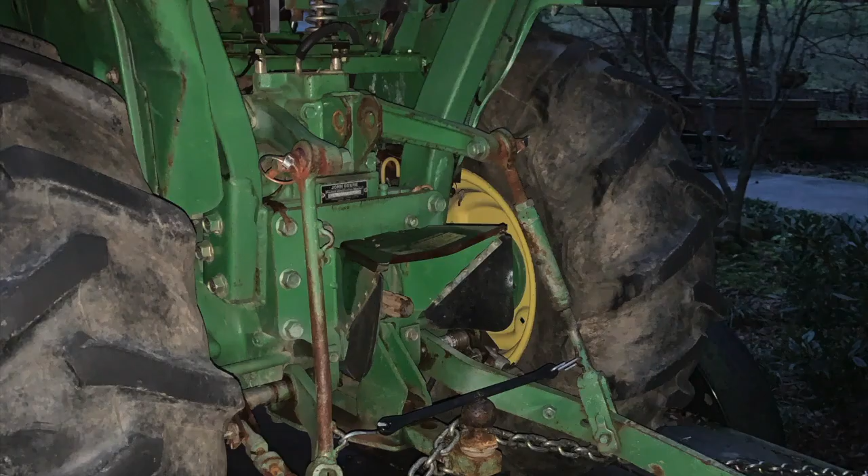So for our project, we're tasked with creating a log lift for a single user. We met with our customer, Mr. Ken Hunter. He was very open with us and discussing his needs and wants out of this project. He really wanted to eliminate a ground worker who was always having to set the tongs he had, or take them off once the log got to the desired location, or someone having to get on and off the tractor. Needed a solution for it.

So our goal was to create these tongs that would mount to his 3-point hitch here on the back of his tractor. That way when the hitch would lower, the tongs would deflect and open up around the log. And once the hitch was raised, there are spikes that would dig into the log and pinch it. That way you could have something to tug against when moving it.

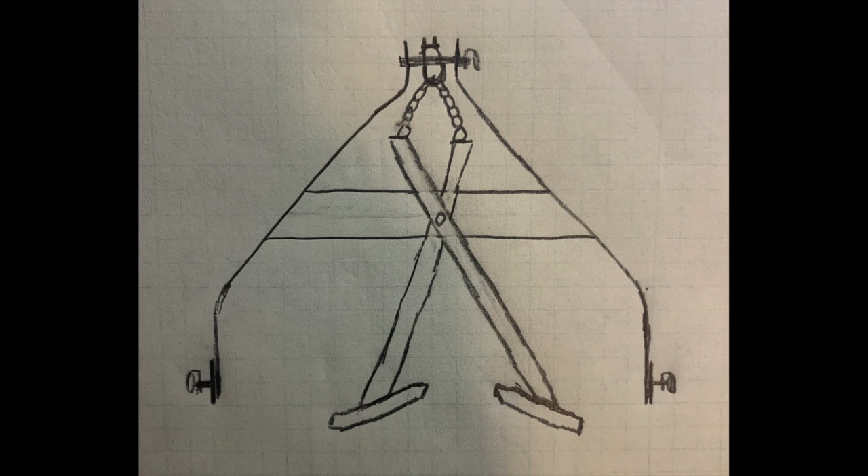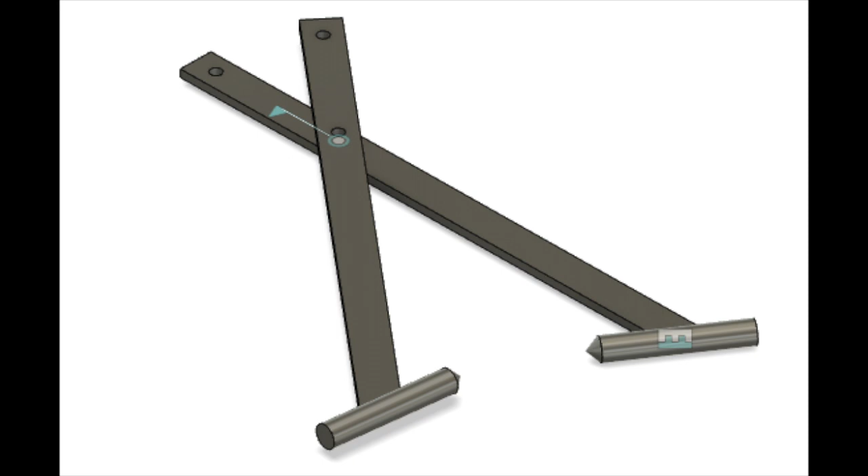So we sat down, we began research on existing products of log tongs and hitches that are on the market, and we were brainstorming between each other, creating drawings and different concepts until we had one that we believe would work right. From here, we dove into the 3D drawings of it. We worked on Fusion 360, created a super easy process for us to have these drawings laid out for ourselves, and then eventually test onto them. We're running our simulations of our factors of safety, our stress, our strains, and displacements that we would come across.

So after we got these drawings done, we created a prototype. I went to Lowe's and picked up materials that would be roughly the same dimensions as we were going to be creating this. So it was 3/8 inch thick by 1.5 inch by 2 feet long pieces of wood there. Have two of them, and on the ends of each of them there is a 1-inch diameter dowel rod cut to 6 inches in length and carved with a spike on the end of it. Those are just hot glued on there.

Each of those pieces is affixed together with a pin running through the center of it, and then a 12-inch piece of paracord at the top of it acting as the chain in this sense. As you can see, the tongs just drop right over the log, which is a very lightweight foam roller in this case. The tongs open up, go around, and then are able to lift. This demonstration also shows kind of how you don't have to open it back up. As long as the tongs are down or the hitch is down after that, you can drive forward with the tractor and it'll allow the tongs to be removed from the log.

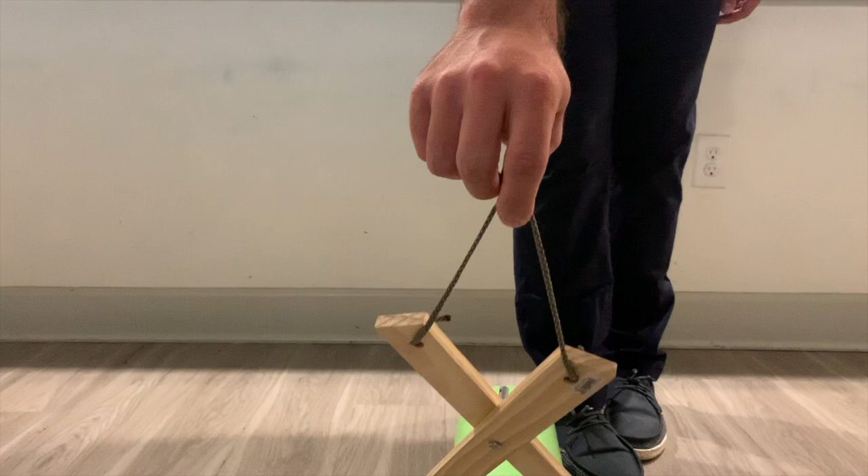So we really wanted to focus on a simplistic design. That way, we wouldn't have to deal with too much extra geometry. On this prototype, we eyeballed the angles. That way, we could at least have an angle to see if the deflection process would work. Obviously, the more open they are, the flatter those spikes get, but as long as it was able to spread open around the log, that was our main focus at this point.

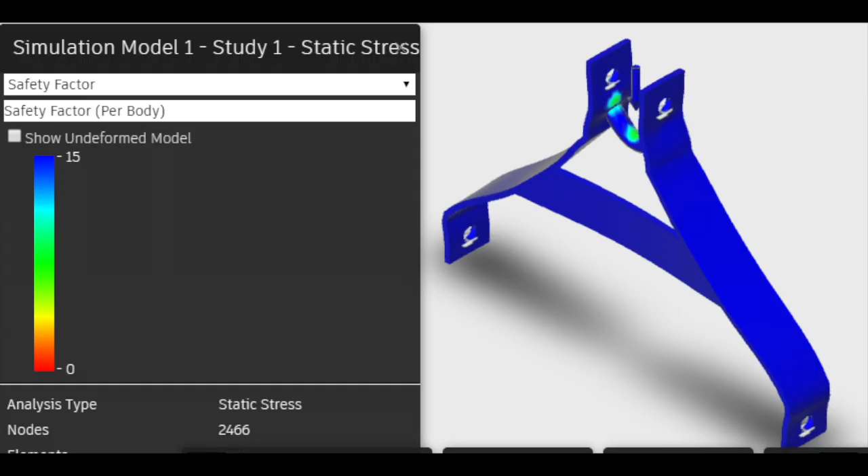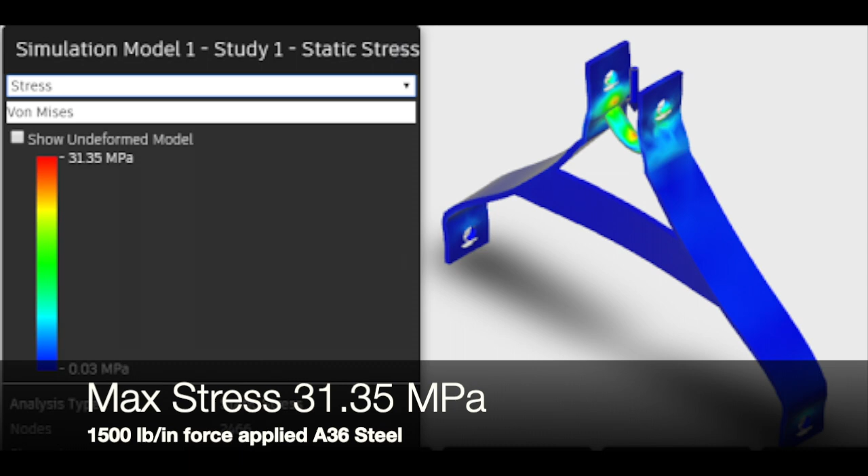So from here, we were able to jump into all of our simulations. With this hitch, we used 1,500 pounds per inch of force located at that blue arrow at the top center of the hitch. We wanted to overload it, showing how stout this thing could actually be. We had a factor of safety minimum of 6.603 and a max of 15. The stress we had was 31.35 megapascals. Only a displacement of 0.0123 millimeters, and a strain calculation came out to be 1.77 times 10 to the negative fourth, which again, we used 1,500 pounds per inch of force. We wanted to overload it.

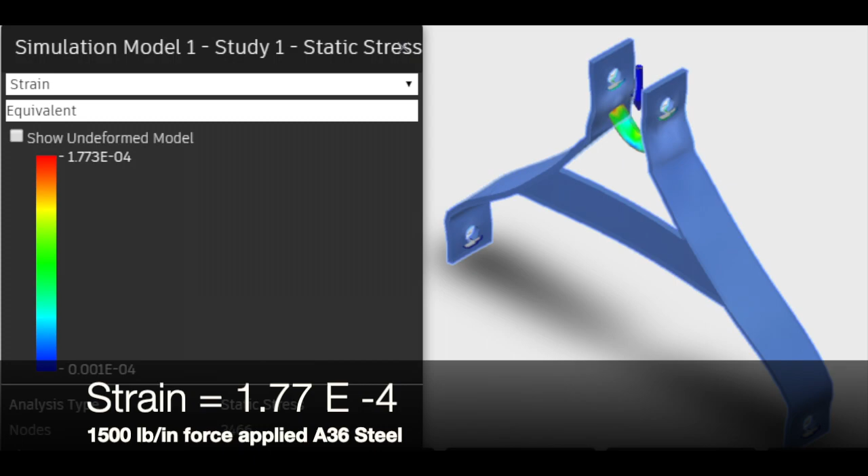We were only required to be able to lift a log that was roughly 500 pounds in weight, because that's all his tractor could handle. But we were thinking, if another tractor on site of a cleanup had to use it, then it could definitely handle a larger log. We ran both the hitch and these log tongs with A36 steel. That was just one of the materials that was listed for us to use. And with these, we had great results as well.

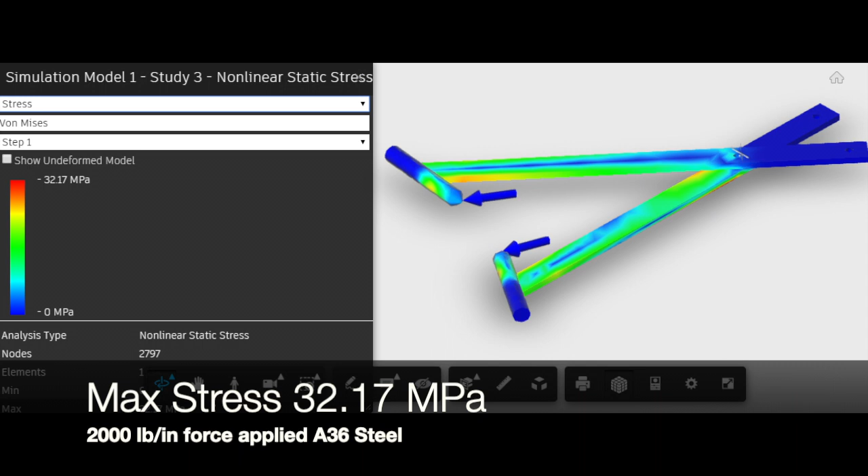Minimum factor of safety of 7.5, a max of 15, a max stress of 32.17 megapascals, a displacement of 1.43 millimeters, and a strain calculation of 2.102 times 10 to the negative fourth. We did load these log tongs down with 2000 pounds per inch of force. We just wanted to throw a little bit extra on there to see what it could hold. Again, we are only required to do a 500-pound log, but with it pulling, there's going to be some drag back from the log and a little bit extra force going on there.

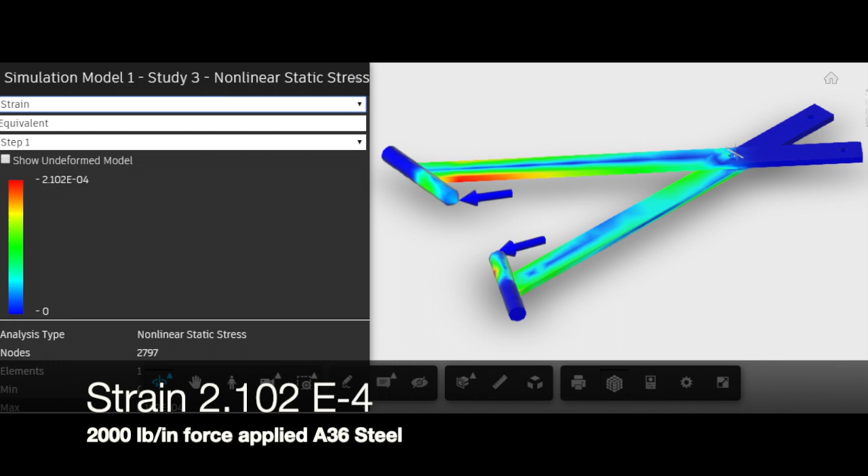So to finalize this video, without completing the actual build of the tongs and the hitch, I could say that our group did meet our goals with a functioning prototype and successful test ran. For future work, we could consider adding a chain looping from each side of the tongs through a clevis on the back side of the tractor to help prevent rotation of the tongs and assist in the pulling when you're actually skidding a log. As well as making interchangeable tips for the spikes. Instead of just having the one cone shape, you could also have some that have just a different grip to them.